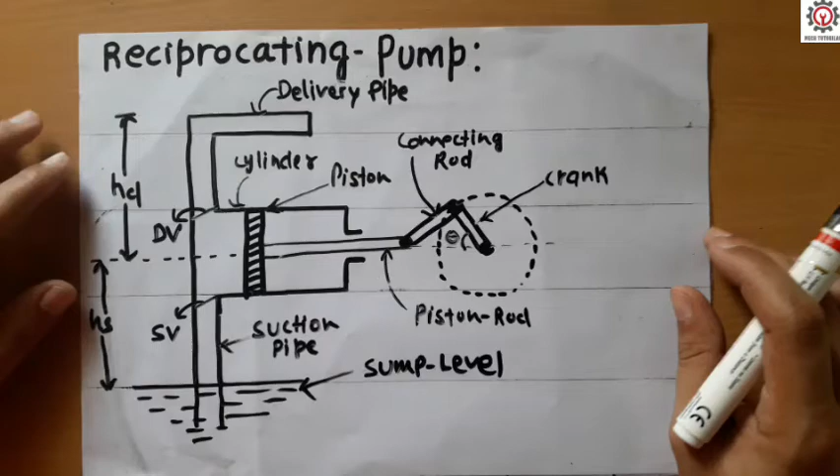Welcome to Mech Tutorials. Today we will study reciprocating pump. It's very easy and simple to understand. It's a type of hydraulic machine like centrifugal pump, but different from centrifugal pump.

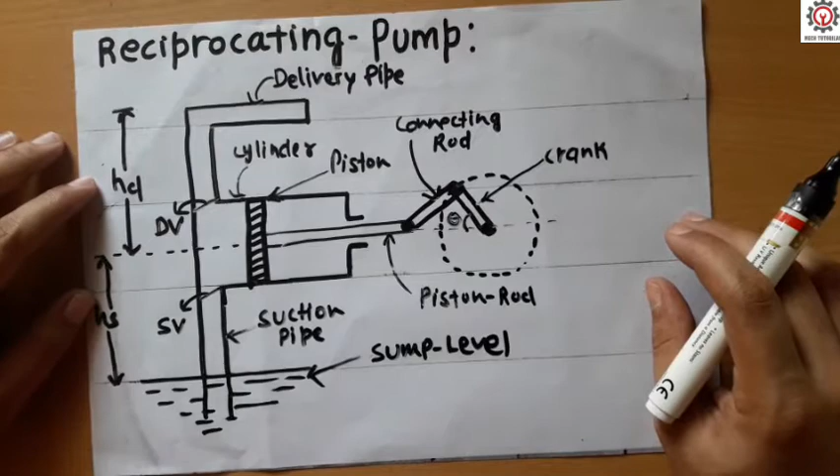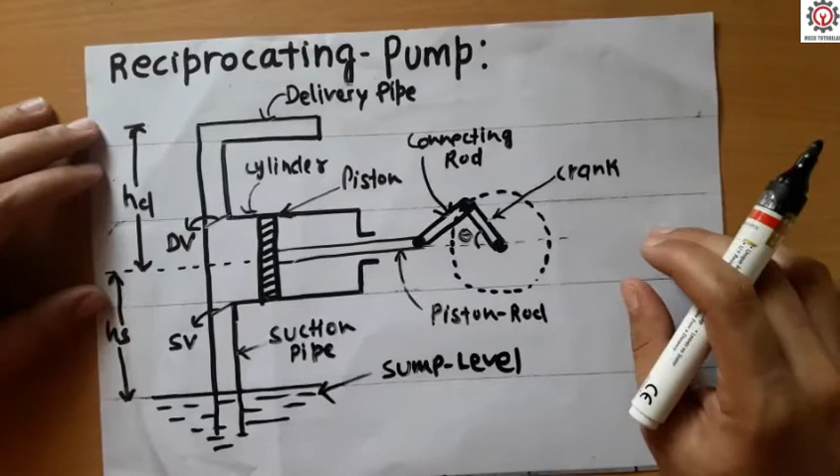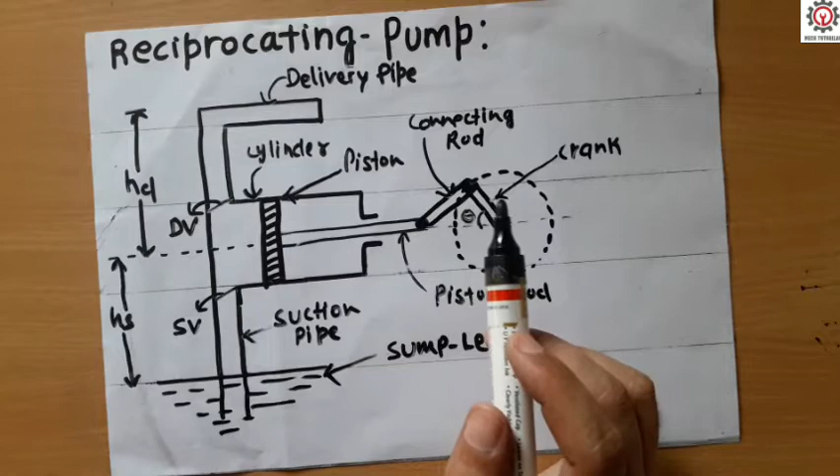First understand the important parts of this reciprocating pump. First part is cylinder. In the cylinder a piston is mounted. The piston is connected to a piston rod which is connected to connecting rod, and connecting rod is connected to the crank. Crank shaft is connected to an electric motor which provides rotational motion to this crank.

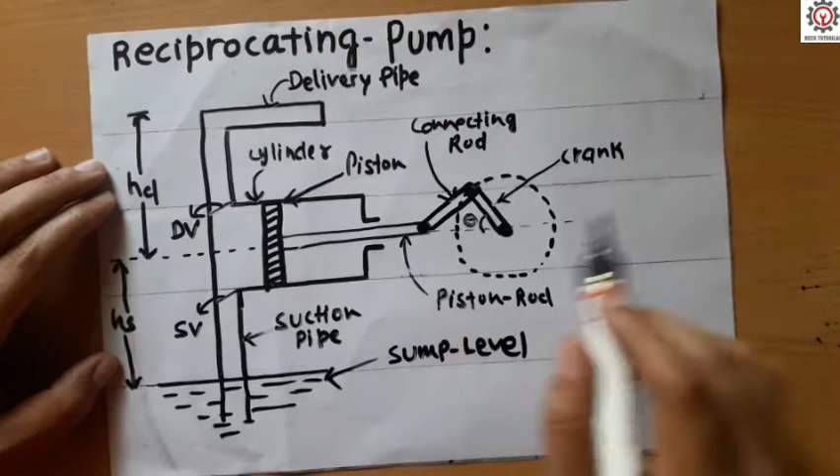When crank rotates, this piston does a reciprocating motion. This is the core concept of reciprocating pump.

This is suction pipe from where water is sucked. This is delivery pipe to deliver the water. This is SV, suction valve. This is DV, delivery valve, to control the flow of liquid in suction pipe and delivery pipe. This is delivery pipe from where water is delivered to a required height.

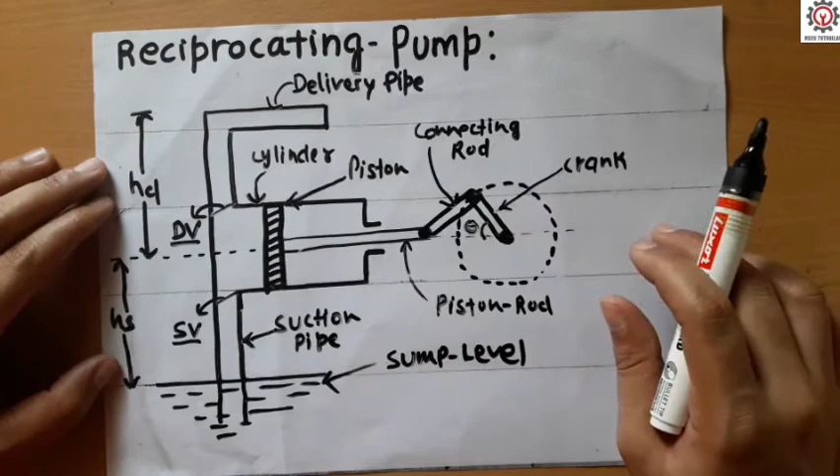Now understand the working of this reciprocating pump. Let's consider this point is A, this point is B, this point is C, this point is D.

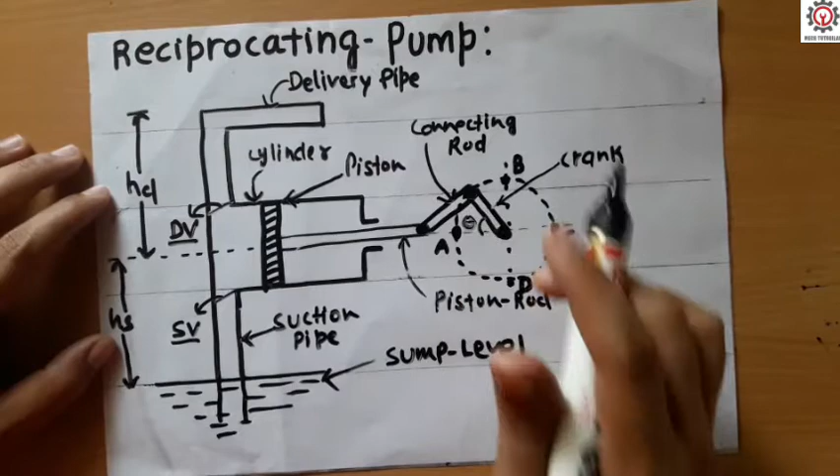When the crank's point is at A, this piston will be at its extreme left position. We show this point of crank at this point, but assume that if this point is at A, the piston will be at its extreme left position.

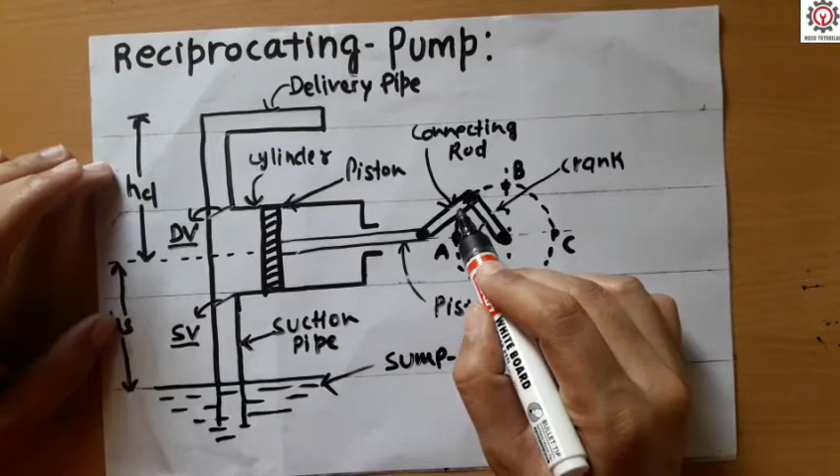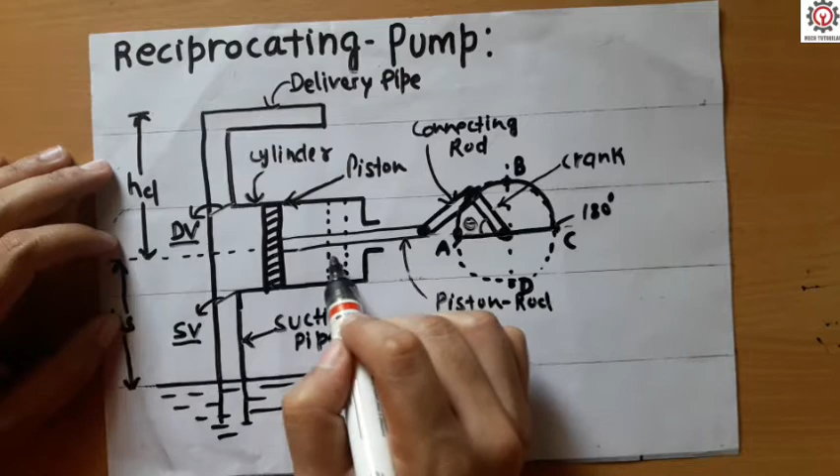When crank starts rotating, suppose from A to C, or from 0 degree to 180 degree, piston moves to the right side and approaches its extreme right position. This is the extreme right position of piston, and this is the distance traveled by the piston.

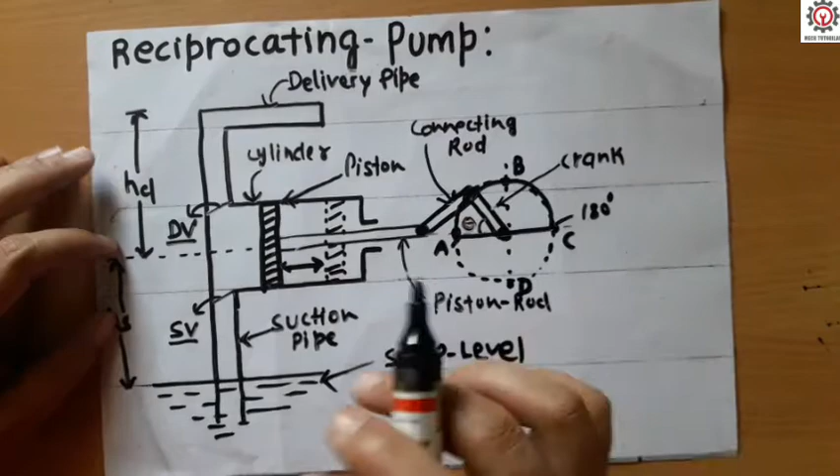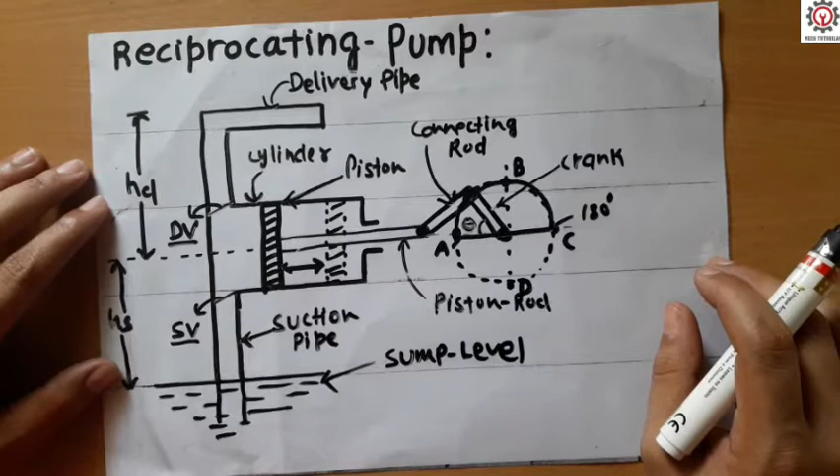When the piston travels this distance, it creates a vacuum pressure inside the cylinder. This pressure created by the piston will be lower than atmospheric pressure, and our water source is under atmospheric pressure, which is 1 atm. We know that water flows from high pressure to low pressure.

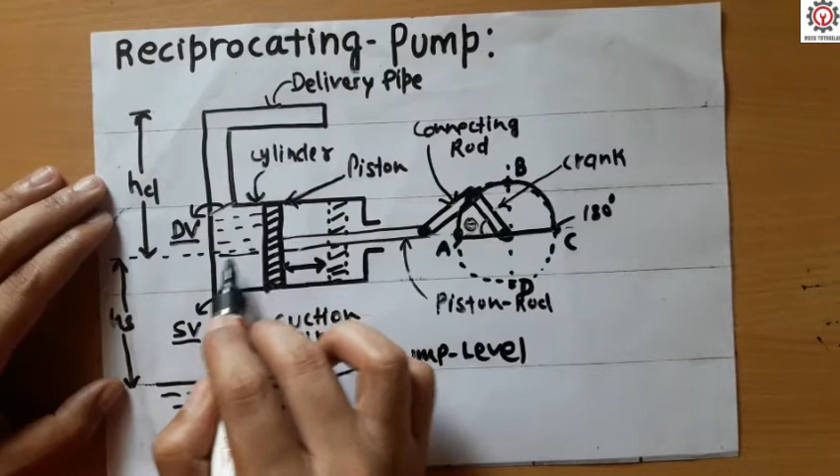So water will start flowing from the suction pipe into the cylinder, and this suction valve will open and water will gather in this vacuum pressure till here. Water will start gathering here.

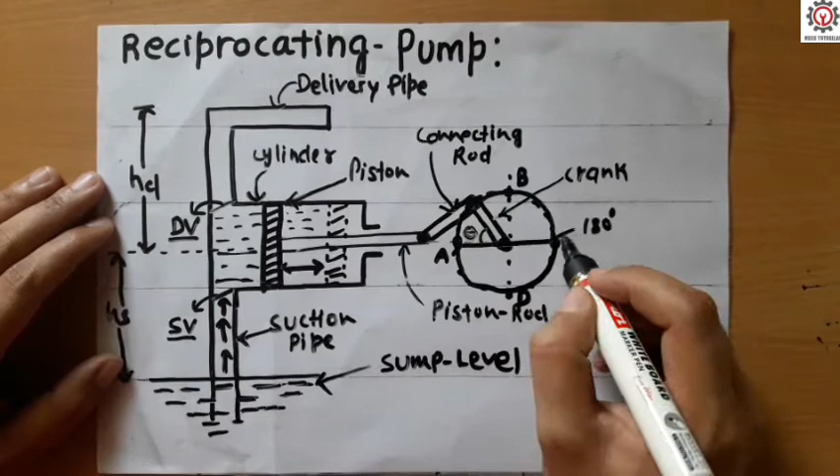Now when the crank rotates from C to A, or from 180 degree to 360 degree, it will complete its half of rotation. This is the first half rotation, this is the second half rotation. When it completes its 360 degree rotation, or starts rotating from C point to A point...

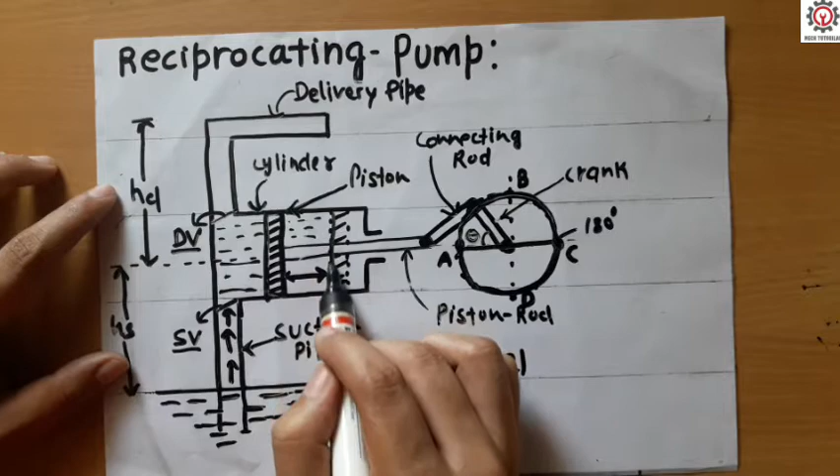this piston will start moving to the left side in such a way that it will approach its extreme left position, its previous position. When it moves from this side to its extreme left position, from here to here, it will exert a thrust on this water which is gathered in the cylinder.

When this thrust is applied to the liquid gathered in the cylinder, that thrust force will increase the pressure of the liquid inside the cylinder in such a way that it will be higher than the atmospheric pressure. And we know that water flows from higher pressure to lower pressure.

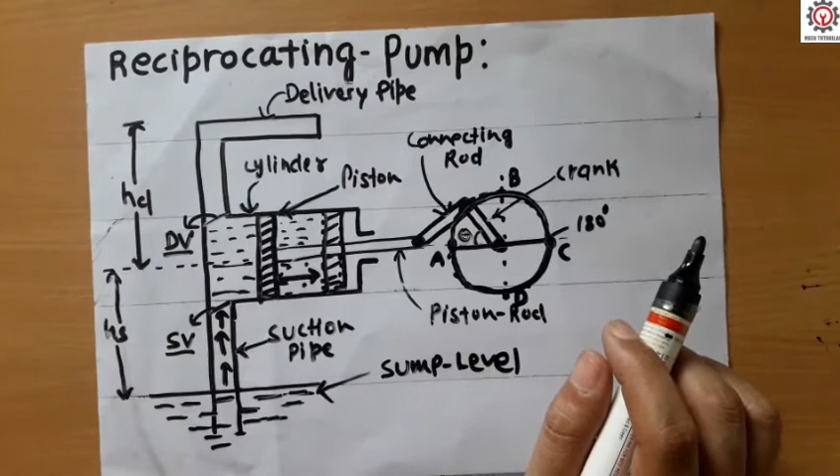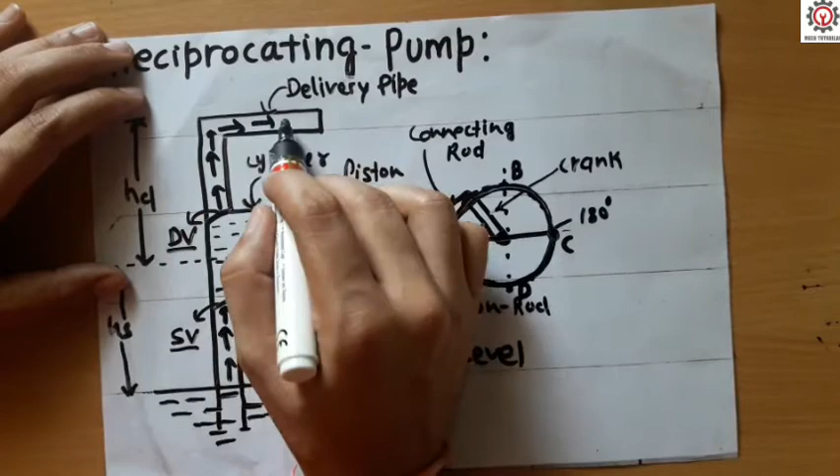So water will start entering into the delivery pipe. This delivery valve will open and water will start entering the delivery pipe to a required head, and water will come out from this delivery pipe. In this way, this reciprocating pump works.